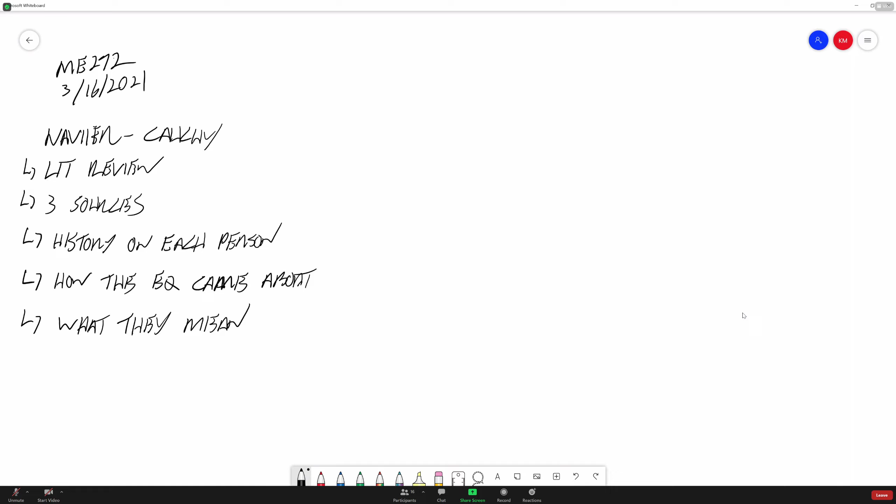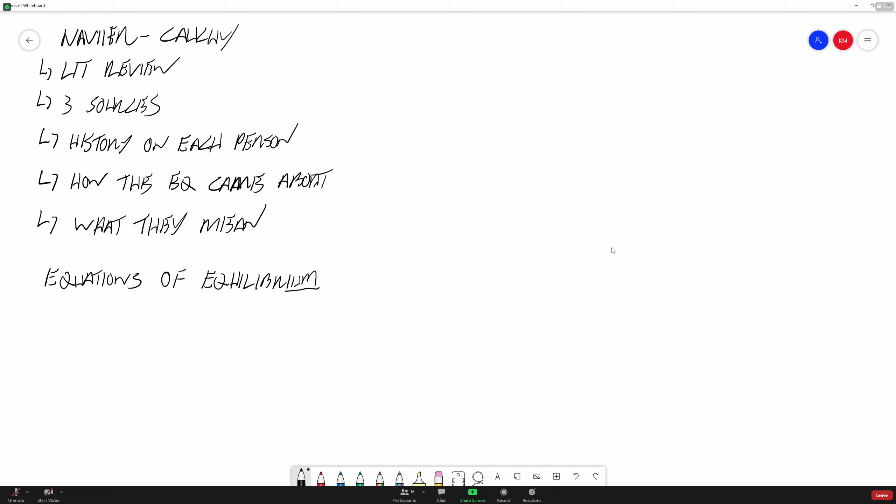So we're going to do a literature review, and I would say three sources or three references, and you'll probably all have overlapping sources. I would hit the history on each person, because what's interesting about them is they're engineers, not mathematicians. I think that's what's cool about it. And then essentially how the equations came about.

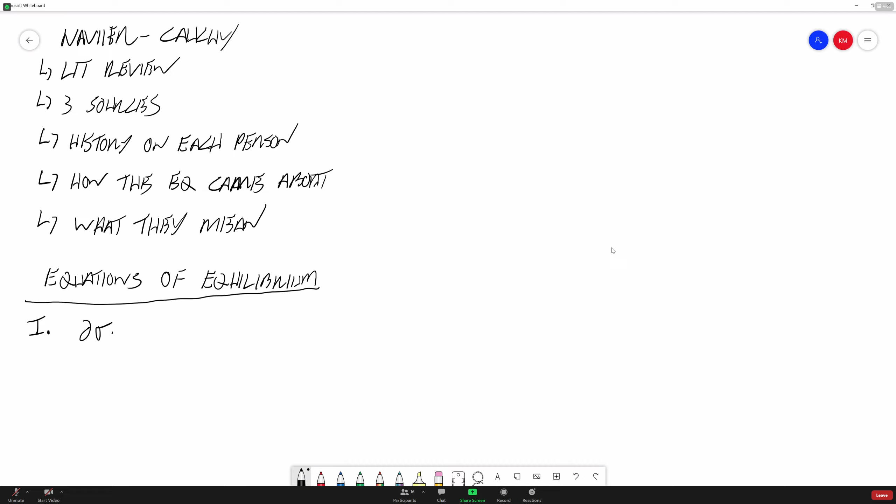And if you can, reach deep, what they mean. And I'll be curious if any of you find this. Excuse me. These equations are going to be in a little bit different form than what I've shown you in the class, but they're the same.

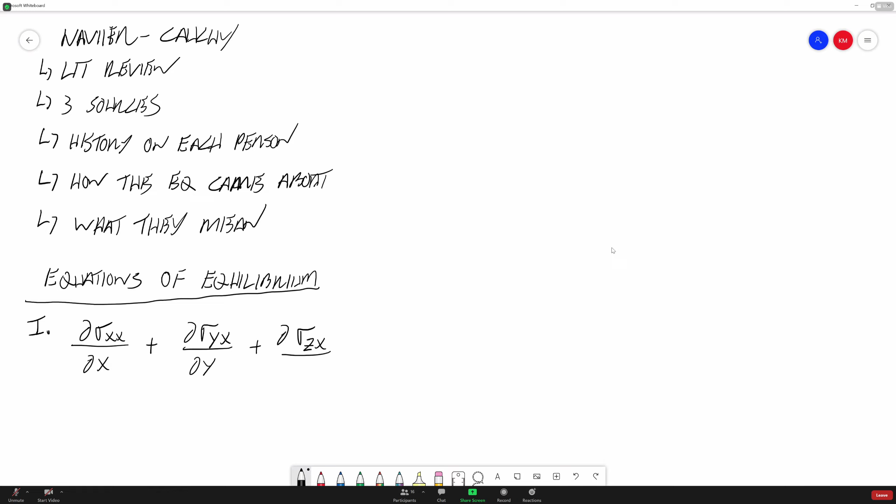So remember how we've talked about this boundary value problem, and there's 3 pillars of equations: equilibrium, displacement, and compatibility. These equations end up being used with different variables, but in the same form. For fluid flow, for vortices, for all kinds of things that describe nature, not just elasticity. So I'm curious if any of you pick up on the trends for these and what they are.

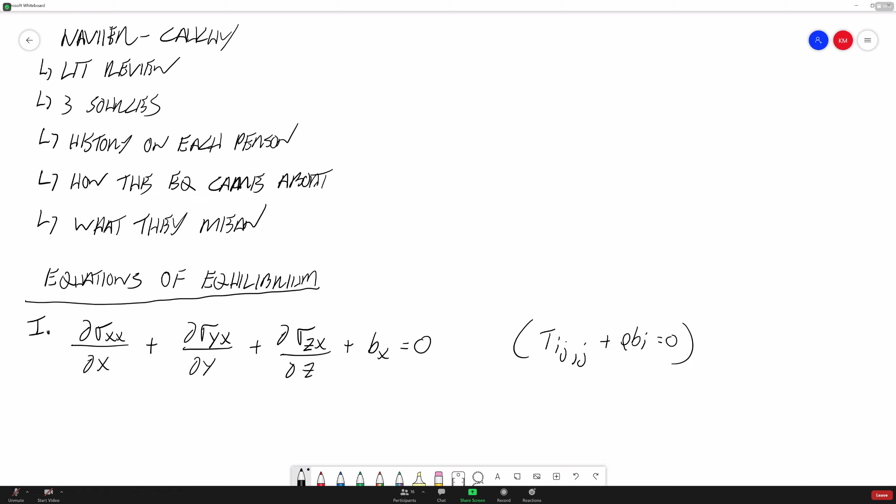So let's go ahead and we'll review what the equations are in the form that you will see them when you do your literature review. So the first one's equations of equilibrium. And like I said, this is a different form than what you've seen. So I'm going to call this pillar 1. So that's consistent. But what you're going to see is written out a little bit different.

So it's the partial of sigma xx with regards to x plus the partial of sigma yx with respect to y plus the partial of sigma zx with respect to z plus bx is equal to 0.

And as a reminder, before I write the rest of them out, what you have seen so far is Tij,j plus rho bi equals 0, right? That's what we called it before. Isn't this the same equation? Because Tij,j is a bunch of partials. So xx, yx, zx, that's essentially just 1, 1. Xx is repeated indices, and so it's just using those separate subscripts instead of 1s and 3s. But this equation right here on the left, does this look familiar with exception of the bx term, the body force term?

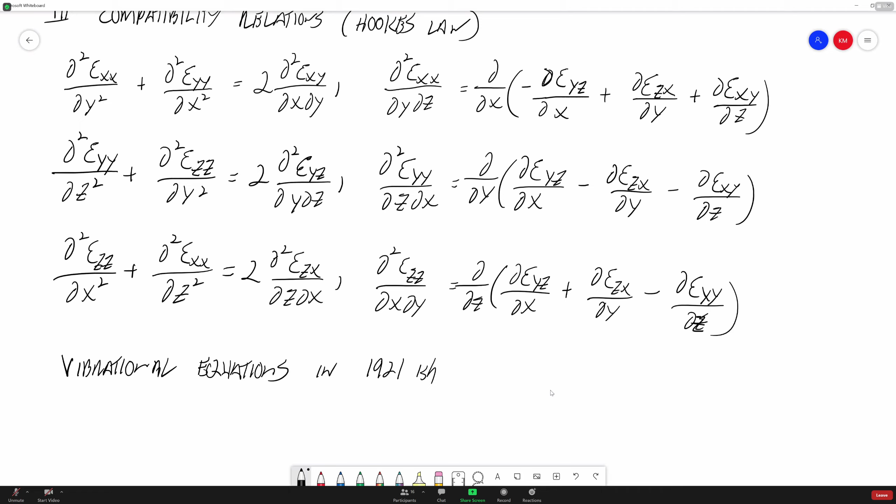And that's part of what I want you to do with this: when you stumble upon these, you should find some narrative about what they are and how they came about, and maybe compare and contrast what I've shown you with how it's used today, and see if you can make the connections that this really is the same relationships. It's maybe just written a different way, or I think it's pretty cool that they did this.

If I remember right, this all came about because of vibrational equations in like 1921-ish or something. So definitely before computers were crunching through finite element analysis, which is pretty crazy.

Okay. Professor, for the terms that have two partials in the denominator, does it matter the order that the partials are in? So you could flip the partial x partial y, it could be partial y partial x, and it would be the same. Okay.

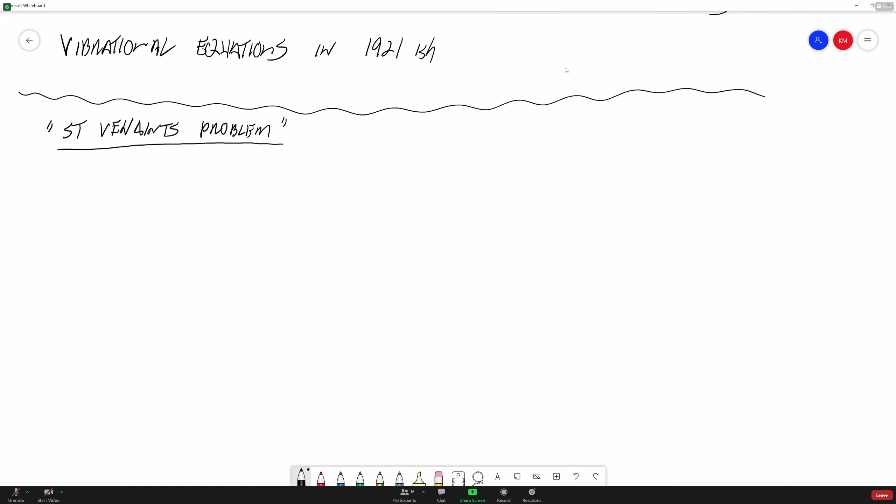Okay. So that's that. We'll call this little literature review our midterm. 100 points. It'll be due 2 weeks from tonight, the 30th, 11:59 p.m. Unless I hear any objections.

And what we'll do tonight and on Thursday is I'll give you a really high level overview of what St. Venant's principle, or St. Venant's problem, is. Talk about plane stress, plane strain a little bit. And that'll take us to the end of this week for spring break. And then when we come back, elasticity is behind us and it's finite element. Okay. Sound good? Yeah. Okay.

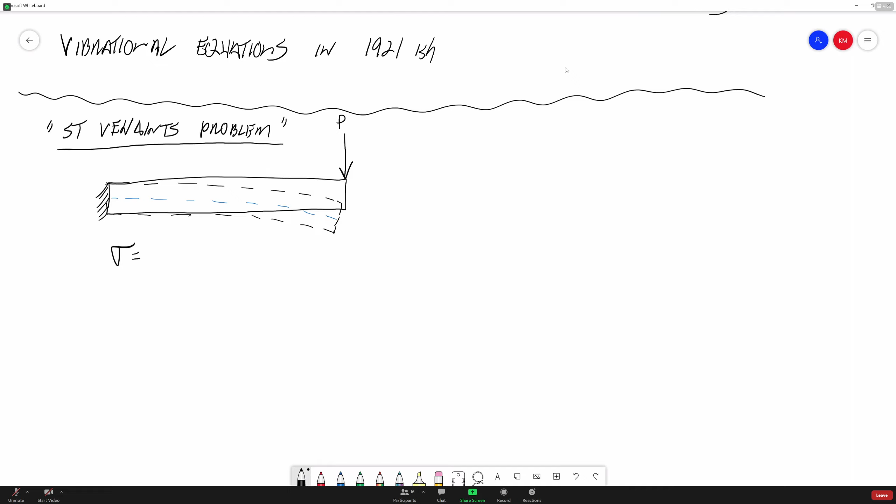So I'll kind of separate this. And there's a lot to this St. Venant's. I probably have 20 pages of notes on this, which we are not going to do. We're going to do just a couple to give you the concept of it. It's a very simple concept. And we don't have to get into the nuts and bolts of the theory, but it's called St. Venant's problem or principle.

And before I even describe what it is, let's say that we had a simply supported beam, and we were to infinitely fix it right here, and we were to put a load on it here. And we're displacing this, right? I don't know if I can do this. We're going to get some deformation out of it. And you guys know from undergrad and ME180, how do you find the stress of this?

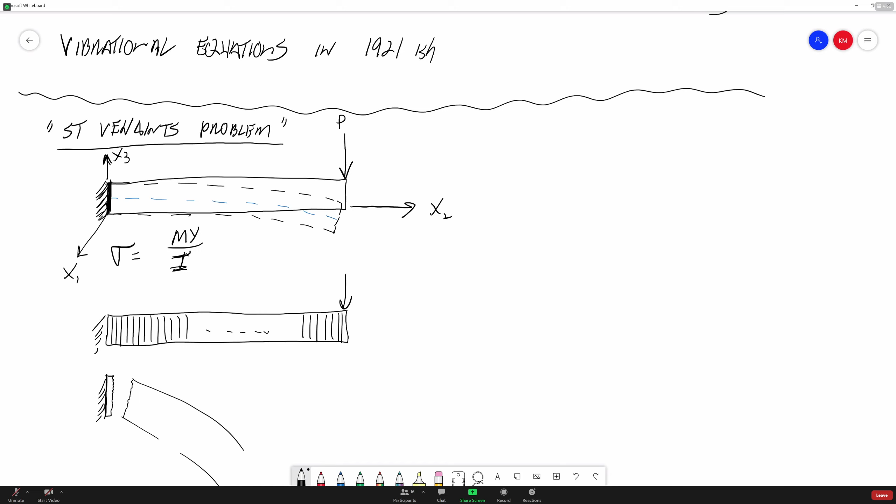Nobody said that, right? We can actually, if we were in ME180, calculate what the stress is there and say, sweet, I got an A, right? But the reality is, think of this a little bit differently now. Let's think of it as a 3D printed part with a bunch of tiny little layers. And you put a load on it and it was fixed here.

And let's say you displace it and instead of displacing, it actually broke. And what you ended up getting was a little fracture surface here where that was fixed, and a fracture surface here where maybe we had some bending that came out of it. So can you kind of visualize that? It would peel apart and just break, more than likely, if you had a big enough load on it.

Yeah. And that's because what's going on right here is it's infinitely rigid, right? It's infinitely fixed. It cannot distort. We can't trust the stresses going on there. We don't know anything about that other than it's fixed. In mathematical terms, we're setting the displacement equal to zero. Nothing is going on there.

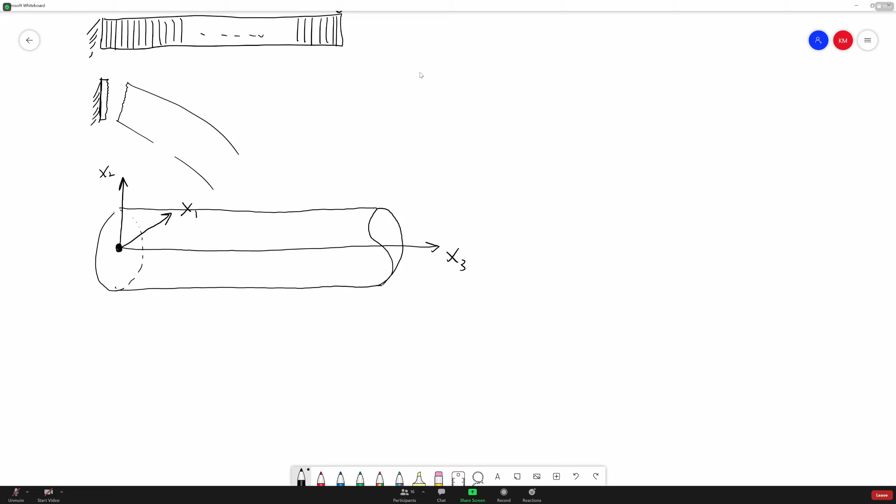So what St. Venant's principle is basically going to show us is you can't trust anything at your boundary condition, but you can trust it a little bit away. And there's a check you can do: if you go a little bit away and then really far away and you get force equilibrium, then your first point close to the boundary condition is good. You can trust the results.

So if you wanted to, you could back up really close to the boundary condition until you didn't get that equilibrium, and then say, nope, those are bogus. It's being affected by my boundary condition. My elasticity professor would probably not like my oversimplification of St. Venant's principle, but that's my interpretation of it. So let's get into the details a little bit more, but that's essentially what we're saying.

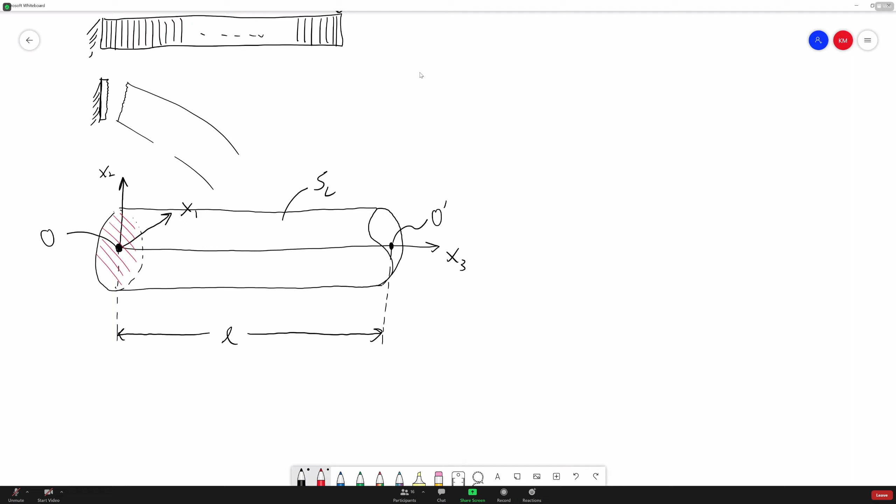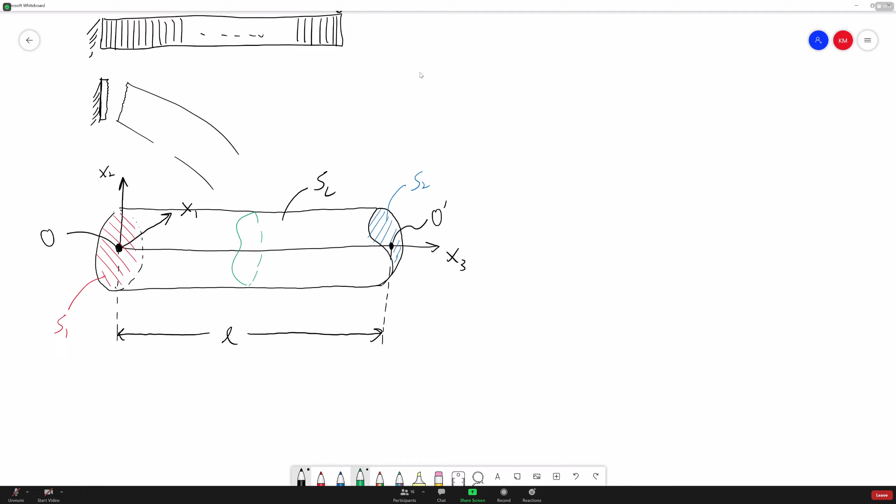So I'm going to do my hardest here to draw a cylindrical object. We're going to say that vertical is x2, horizontal out of plane into the screen is x1, and longitudinal is x3. And we're going to say that this is a cut section. And our origin back here is O.

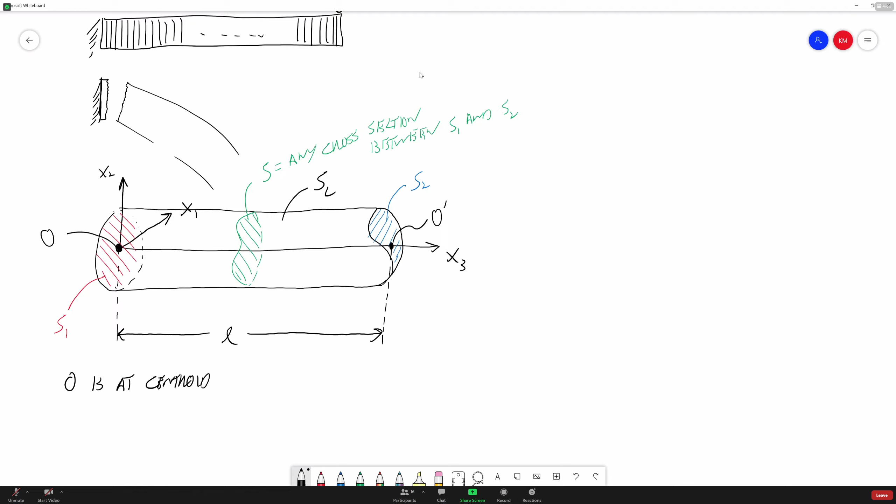And I'm going to pick another point on this surface here, and we're going to call this O prime, or O1 if you will. And this distance here is going to be called L. And our bar we'll call S_L. So the body is S_L. This surface right here is our boundary condition, and we're going to call this S1. This surface on the end, we're going to call S2.

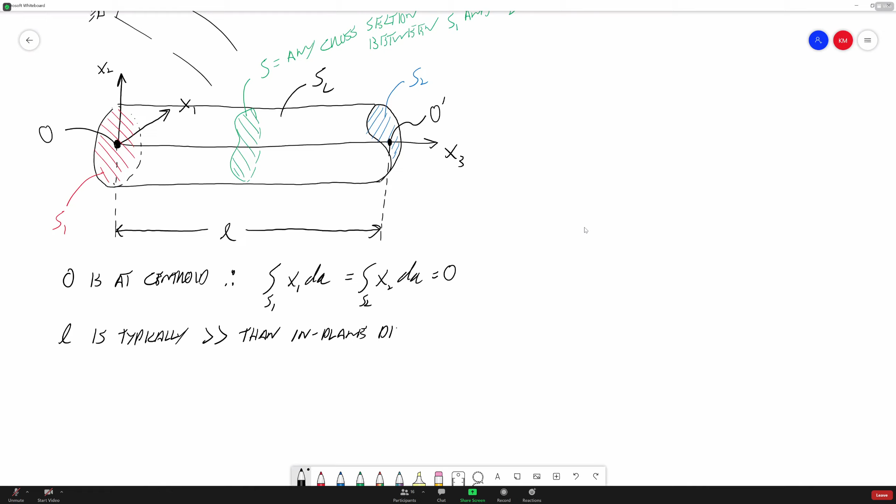And we're going to create some random area in the middle. We're going to just call this S. And S is equal to any cross section between S1 and S2. What else do we have? O is at the centroid of the cross section.

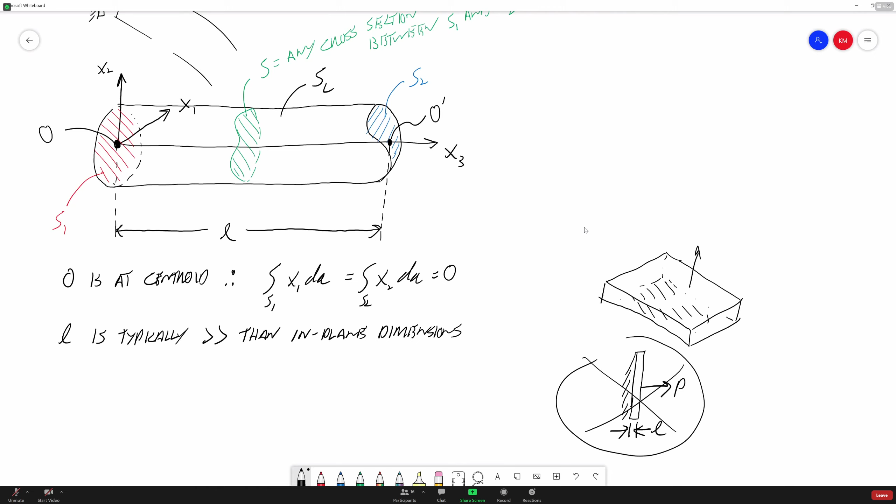Therefore, the integral over S1 of x1 dA is equal to the integral over S of x2 dA, which is equal to 0. What else do we have? L is typically much greater than the in-plane dimensions.

So we can't use St. Venant's principle on a thin plate, is what this is saying. Where let's say that our boundary condition is this bottom surface here, and then we're going to apply a load on it. I probably should have drawn this differently.

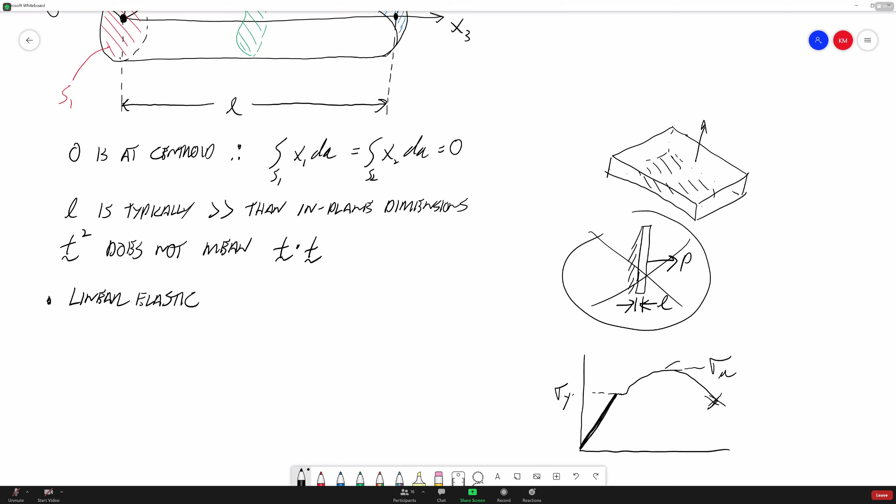I'm going to use a notation 1 and 2 superscript on tractions. That does not mean squared. So let me write that. So traction, this, actually, yeah, I'll keep it this way. Does not mean squared. And this is going to make some assumptions.

So we're assuming linear elastic. So assuming linear elastic, nothing funky going on in our material curve. So we're going to apply a load that is below yield strength. So what I'm telling you right now is this is valid for linear elastic. I'm not saying it has to be linear elastic material.

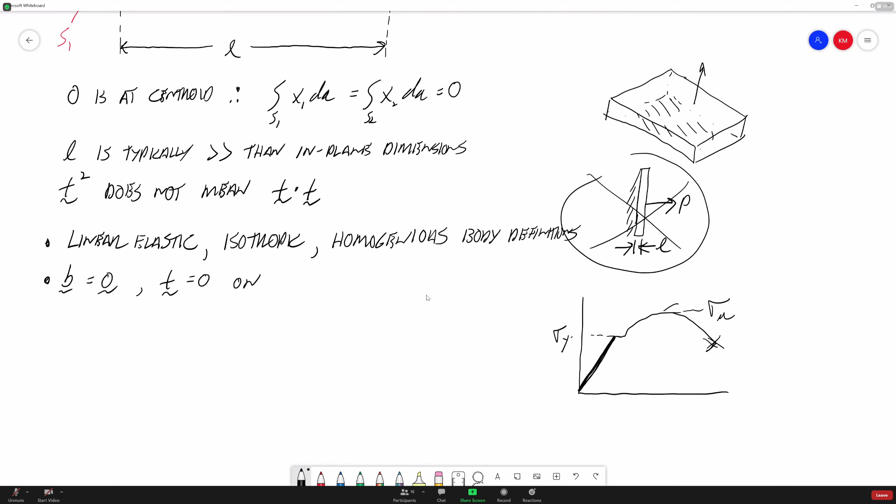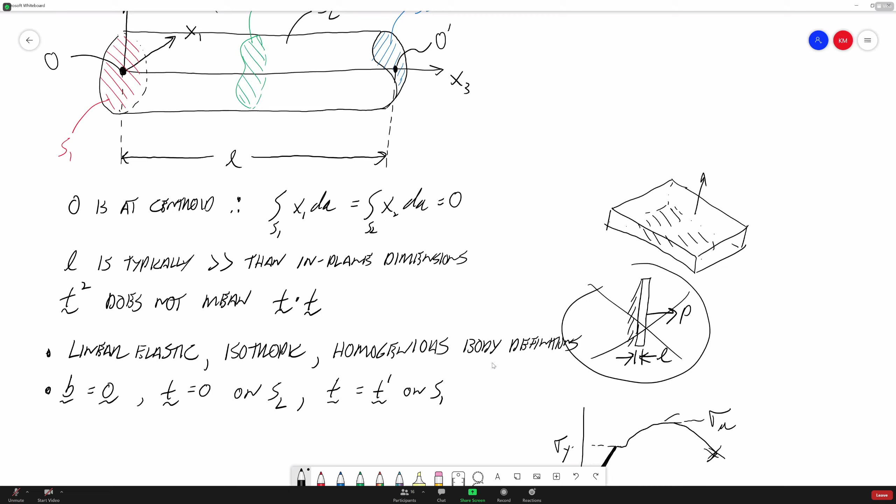Let's say I'm dealing with steel, and it has linear elastic material up to sigma y, right? Sigma y, and this is my sigma ultimate. What I'm saying is this is only valid for stresses and strains and displacements in the elastic region right here. As soon as you load it to where you go plastic, St. Venant's is no longer valid for any of the plastic flow. So it's not a function of just material. It's also a function of your loading. If you take it into the plastic region, then you cannot apply the St. Venant's principle.

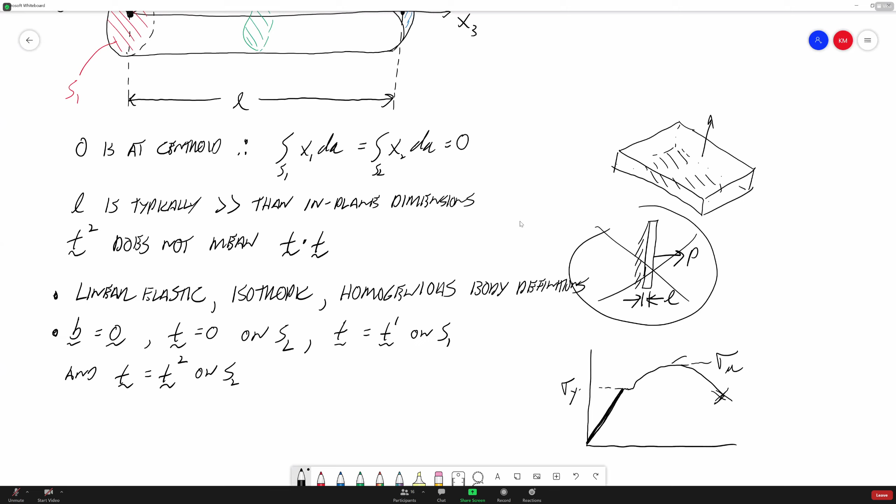So linear elastic, isotropic material, and it's homogeneous. Homogeneous body definitions, meaning if you apply a body force to it, it reacts homogeneously with the material. There's not sections within the bulk of the body that would behave differently than something else. What this also implies is that our body force is equal to 0.

We're saying that our traction is equal to 0 on SL. Where's SL? Yeah, on SL. I don't think I wrote the subscript. Yeah, I did. So the complete surface, the outer surface of the body, is SL. So that means it's traction free around the cylinder. There's no tractive forces on SL.

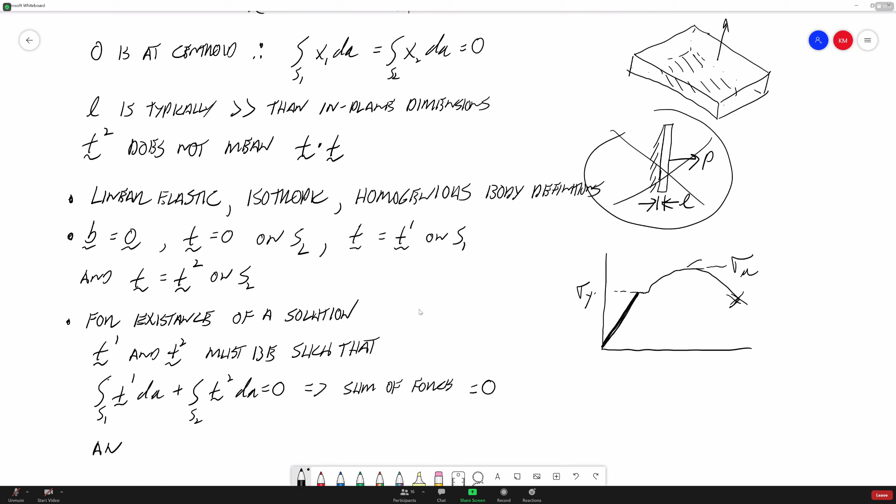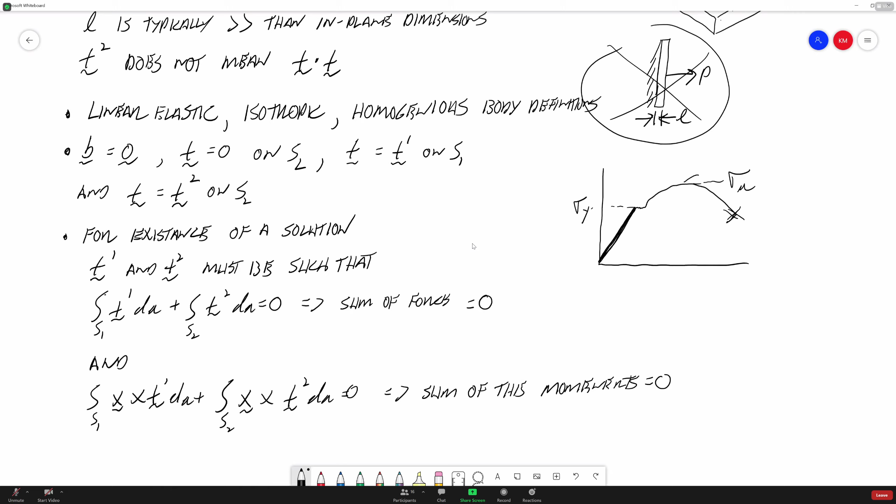We're saying that the traction is equal to traction superscript 1 on S1. So on S1, we basically have a traction, and we're calling that traction T superscript 1. And the traction is equal to traction superscript 2 on S2. So S2, the surface here, no other applied tractions on it.

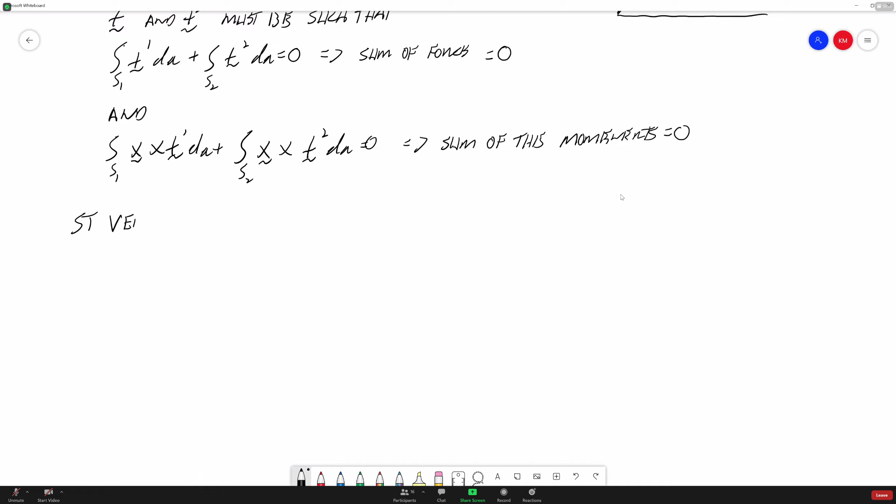For existence of a solution, T1 and T2 must be such that the integral over S1 of traction 1 dA plus the integral over S2 of traction 2 dA is equal to 0, which implies sum of forces equal to 0 and sum of the moments equals 0.

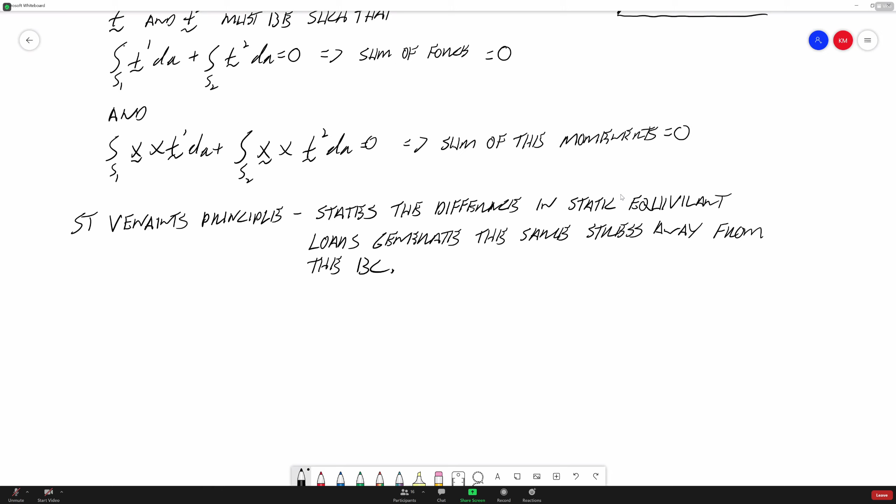So that is the integral over S1 of x cross traction 1 dA plus the integral over S2, and that's sum of the moments, equals 0. So now we're going to have a little bit of narrative, and I'll try to write nicer. What's the x vector there represent, that squiggly line? That's the distance from the origin for a moment. Oh, sorry, that was distance.

So Saint Venant's principle states that the difference in static equivalent loads generate the same stress away from the boundary condition. There's more.

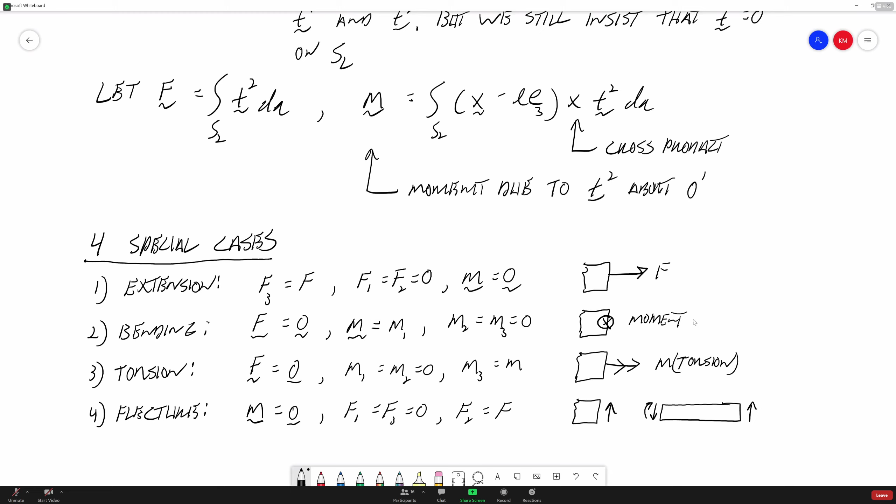And then the fourth one is flexure. Moment vector is equal to our 0 vector. F1 is equal to F3 is equal to 0. And F2 is equal to F.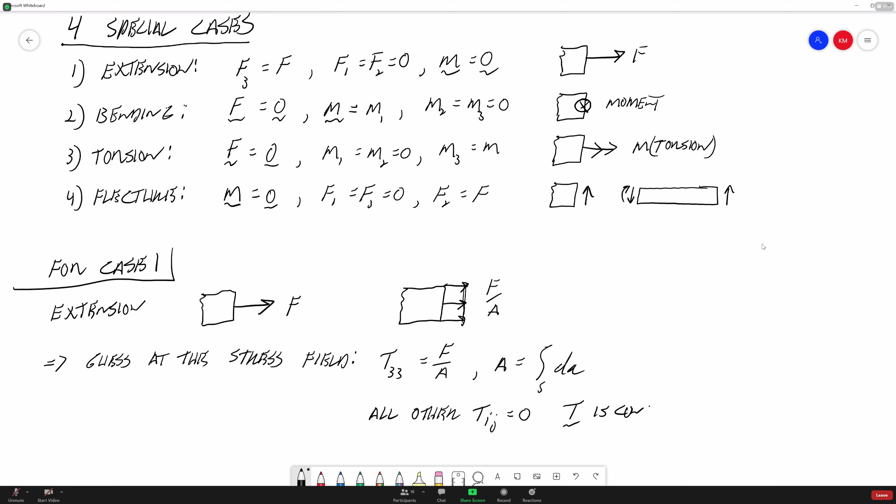So the idea is if you have a problem, you would try to break it up into a superposition of these different principles. So you would say it has extension and it has bending. Or maybe it has extension and torsion. So you'd kind of break it up that way.

But essentially, well, we have a few minutes. So I'll go over the extension one and kind of show you that one. Yeah, that's one that we can get through, and it's probably the most useful.

So for case one, extension, it's simply, what we have drawn here is, we have a force, but that implies that we have a uniform distributed load, right? So force over area. So the way you approach this is you guess at the stress field.

T33 is equal to F over A. And A is equal to the integral of dA. All other Tij equal 0. And our stress tensor is constant. That's just a fancy way of saying that this is not a dynamics problem. Our stress field is not changing. Okay.

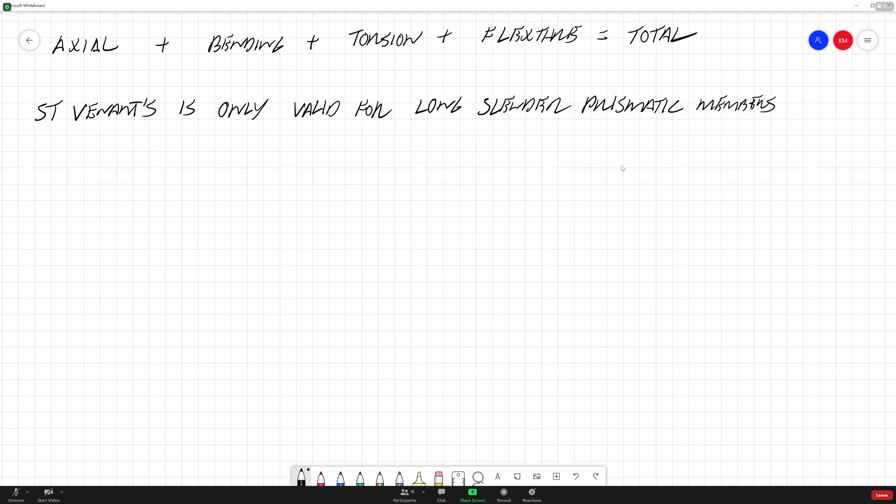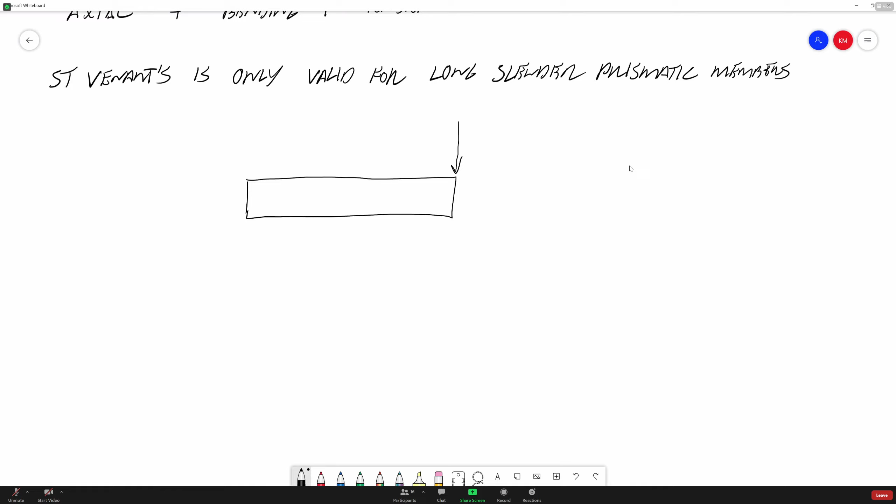But in general, St. Venant's is only valid for long slender prismatic members. Sure. So short, stocky plates and things like that, you wouldn't be able to claim St. Venant's principle. You have to move out away some distance from the boundary condition to claim it.

But this is kind of the beginning to this complicated view of: you can't trust the stresses that are at your boundary condition. You've got to move a little ways away. So one of the things that you can do, you can look at the strain rate, or look at the displacement field, how quickly it's changing from your boundary condition.

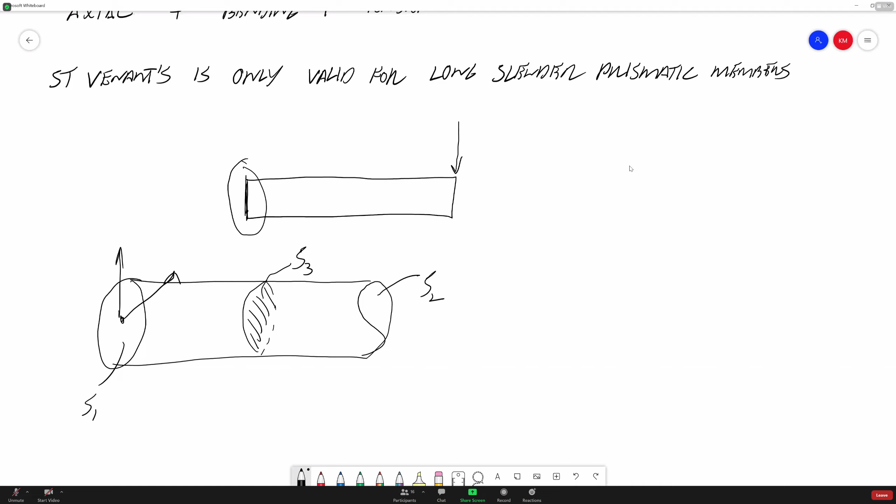You'll have stresses and strains and displacements will be zero, but you'll end up with stresses that are going to like infinity right at your boundary condition. They'll be really, really high. So you just back off until it drops off to a more normal value. So, okay. So that's St. Venant's. Not too exciting, huh? A long way of saying don't trust the stress at the boundary condition. Don't trust the strain at the boundary condition.

So let's circle back to something. So let's say that you have this beam and you need to put a load on it. And let's say that you need to know what the stresses are going on here. How would you find out about that? What are things that you could do so you could evaluate the stress here? But let's assume this isn't something that you could do by hand. It's something very complicated. You're going to do it by finite element method.

You could make it longer and then see what the stress is if you cut it at that length. Yeah, and isn't that kind of the same thing that we showed with the St. Venant's principle? Remember, we showed the cylinder with an origin. I mean, it was only a few minutes ago, right? And we basically said, yeah, we have this deal, and we have a cut in it, right?

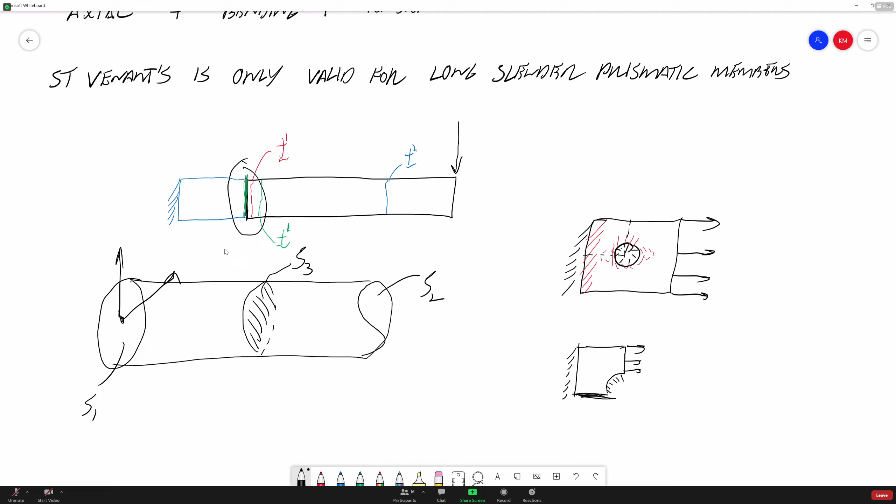So for instance, maybe you've done something in the finite element world where you have a top view of a plate, and you're applying a distributed load to this. And let's say for whatever reason, you created a boundary condition in a hole here. Actually, those aren't arrows, I meant to show these as a fixed boundary condition. Based on St. Venant's, you probably can't trust anything in here and around here, and you get this elliptical shape that you can't trust because of boundary condition effects.

So you really have to be careful with how you do your boundaries. And in fact, with this problem I'm showing, a super theoretical person would say you should section this part in a quarter to avoid that. You wouldn't analyze the whole plate, and it would simplify boundary conditions, because then you would have a fixed boundary condition here and a fixed boundary condition here, and here would be an equilibrium based on there.